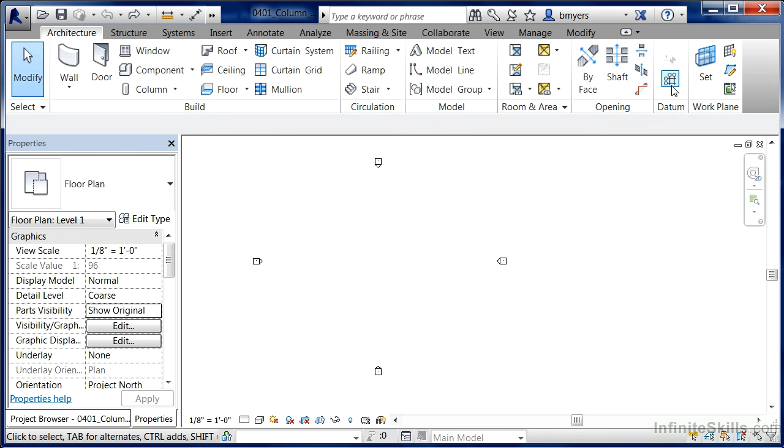Column grid lines are used to equally space your columns in your project. They're also used to be able to quickly locate your columns in your project. To draw in column grid lines, you'll find underneath the Architecture tab on the ribbon, on the Datum panel, there's a command called Grid. Select on the Grid command, move your mouse down into the drawing area.

Over on the left-hand side, toward the bottom, between these two elevation tags, make your first click. Move your mouse straight up, then click again just a little bit below this top elevation tag, but straight up at a 90-degree angle. If you zoom in at the top, you'll notice that this is a number 1. This is our first grid bubble.

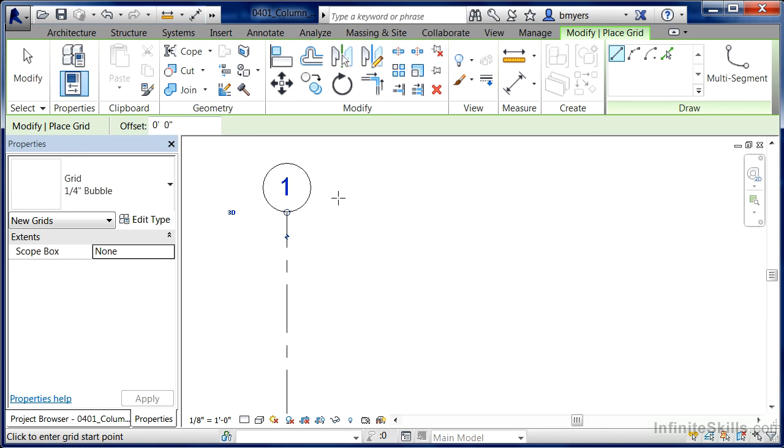Revit likes to keep things in order, which means the next one that we draw will be number 2. The one after that will be number 3. The same thing would happen if we had letters. So if this was going to be A, the next one would be B, and the following one would be C. Zoom back out, move your cursor down toward the bottom of the screen again. When you see these temporary dimensions show up, I don't care exactly what the dimension is at the moment, we will adjust this later. So just click when you see that temporary dimension.

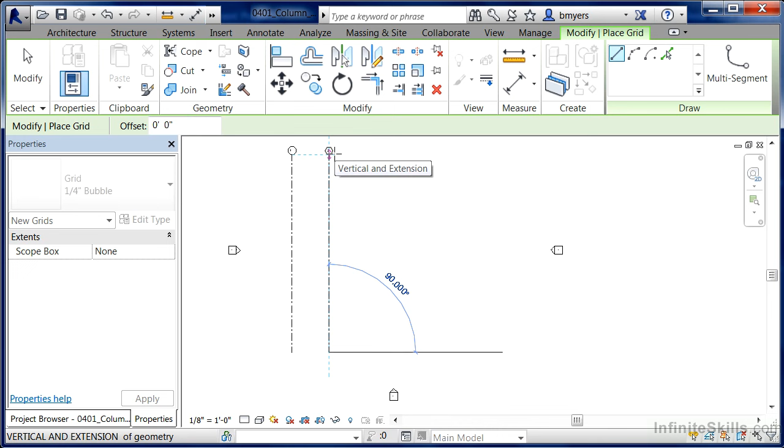Move your cursor up on the screen. When you're lined up with the column grid bubble up at the top of this grid line, you'll see a dashed line going between the two grid bubbles. Click when you see that dashed line. This means that these two grid bubbles are lined up with one another. Let's do the same thing for the third grid bubble. Come straight up and click again.

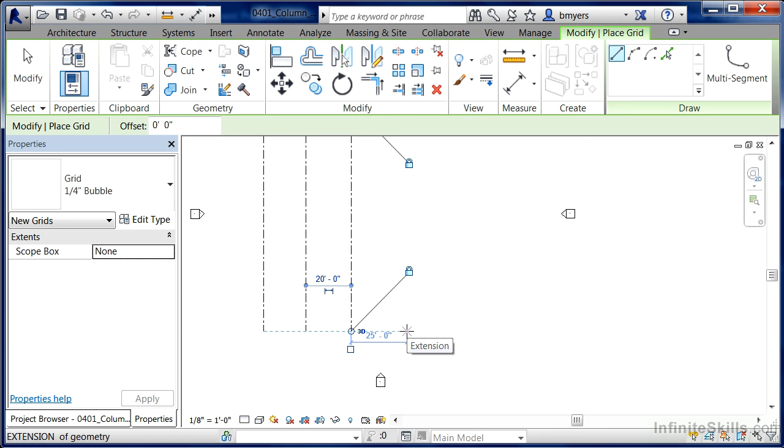Now, if we wanted to have a specific distance between these, we can do that as well. As soon as you see this temporary dimension show up, in this case it shows up as being 25 feet on my screen, type in 20. This is going to give us a 20-foot distance between the first one that we place and the next one that we place. Hit enter, and you can see that it's now made a 20-foot spacing between this one, which was the last one that we had placed, and this one, which is the spot that we just clicked.

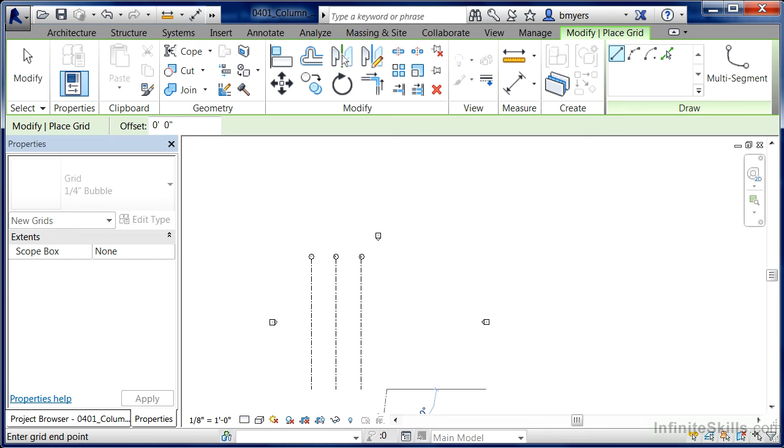Come up, click there, and do this one more time. You can either type in a dimension or just eyeball it, clicking and moving straight up. If we zoom in, we'll see that it's 1 through 5. Because of that order, it means that the next one that we will have will be number 6. The reality is, though, I want to go from right to left, and in doing that, we want to switch this from being numbers to letters. There's really no way to be able to do this on the fly, so we have to place the first one in and then adjust it after it's been placed.

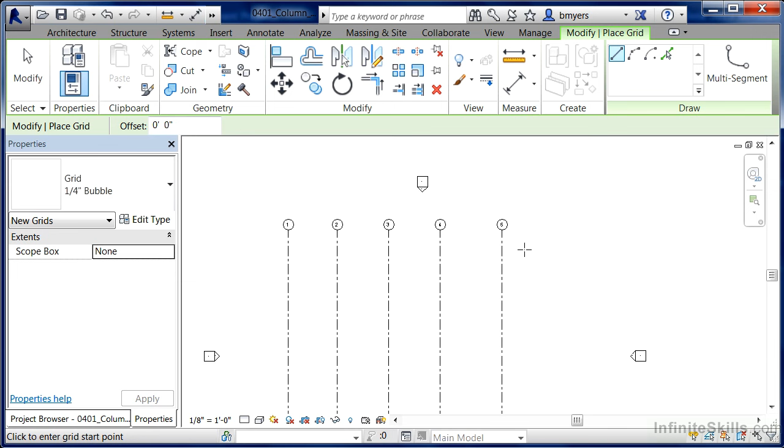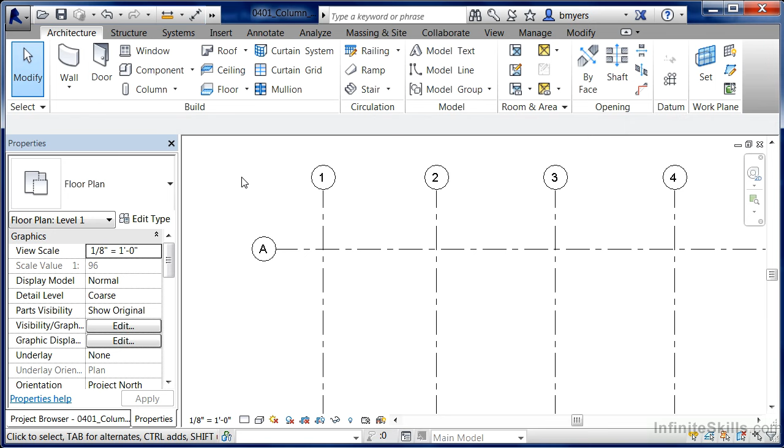So click over here to the right-hand side, move over, and click again. You'll see a number 6 show up. Hit escape a couple of times on the keyboard. Select on the grid line, click where the number 6 is at, and change that to be an A, and then click out here into space. Then hit escape on the keyboard to get out of the command. The next thing we'll do is draw in 2 more, so we'll be drawing in B as well as C. And since this last one was A, Revit will automatically label these as B and C.

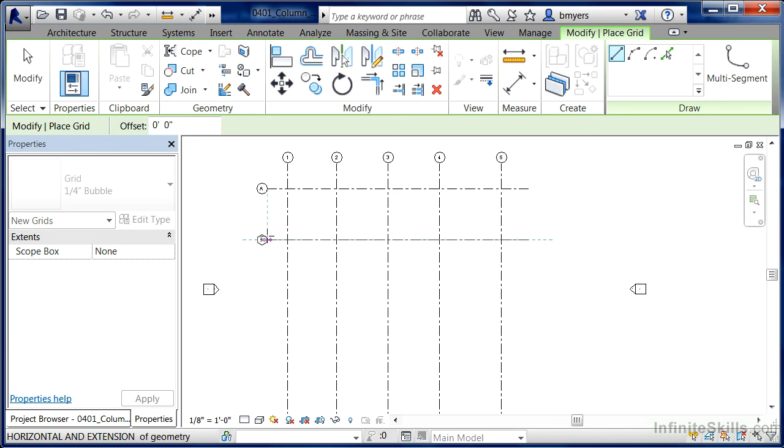Once again, under the Architecture tab, above Datum, select on Grid. Move your mouse down when it's lined up with the endpoint of the other one, click, move over, and click again. And do the same thing one more time. Zoom out just a touch. We're going to see that our grid lines come down pretty far, actually a little bit farther than what we probably need them to be. We will adjust these after the fact.

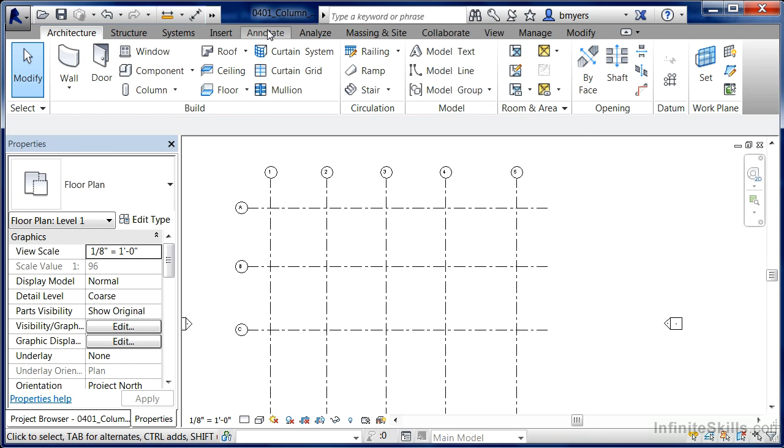What I would like to do now is be able to equally space these between number 1 and number 5. To do that, we need to add a few dimensions in. So come up here to Annotate, select on Aligned, and click the line associated with grid number 1. Then click the line associated with number 2, number 3, number 4, number 5, then click out in space. It's important that you click out in space because if you hit the space bar, the dimension will go away. After clicking all the way on across, click the little EQ that shows up. This will equally space between the first one and the last one in the dimension string.

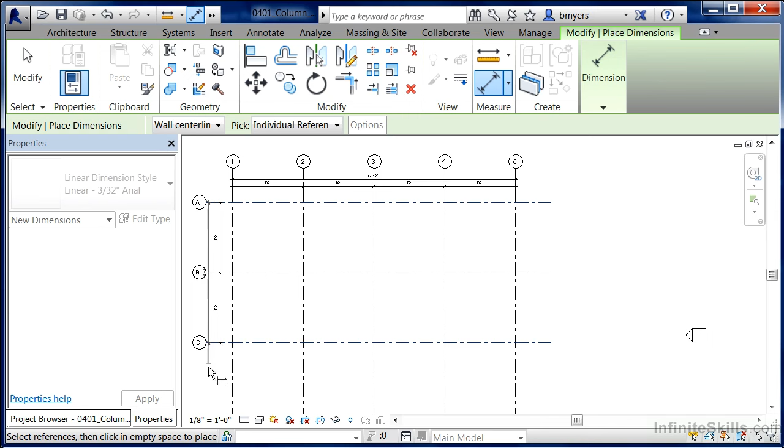Now do the same thing between A, B, and C. Click out in space and select the EQ. We also want to be able to have these spaced a specific dimension apart. To be able to accomplish that, let's drop in 2 overall dimensions. Click where the number 1 is at, click where number 5 is at, click out in space. Do the same thing with A and C, click out in space. When you're done with that process, hit escape a couple times on your keyboard to get out of the command.

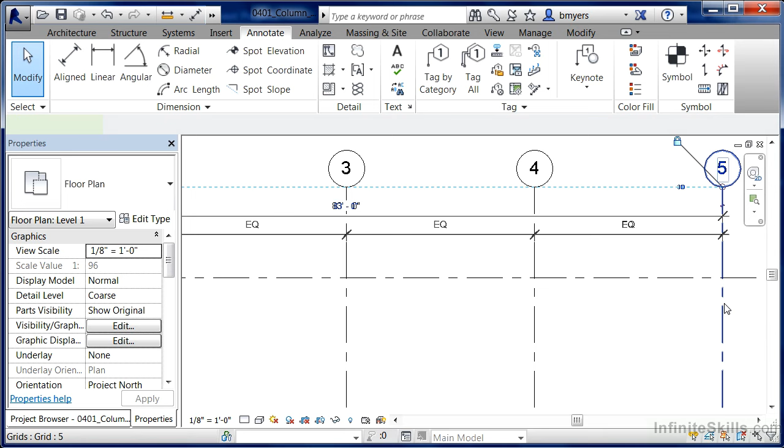Zoom in so that you can see this dimension. In this case, it's showing up as being 83 feet, but I'd really like this to be 80 feet. So move your cursor over and select on the line associated with your grid number 5. Come back over again. You'll notice that this dimension is now blue. Whenever the dimension is blue, it means that you can change that information. So click where it has the 83 feet and just type in 80. This will give you an 80-foot spacing between the first and the last. And then click somewhere in the white drawing area. It's automatically moved these grid bubbles, and they're continuously equally spaced.

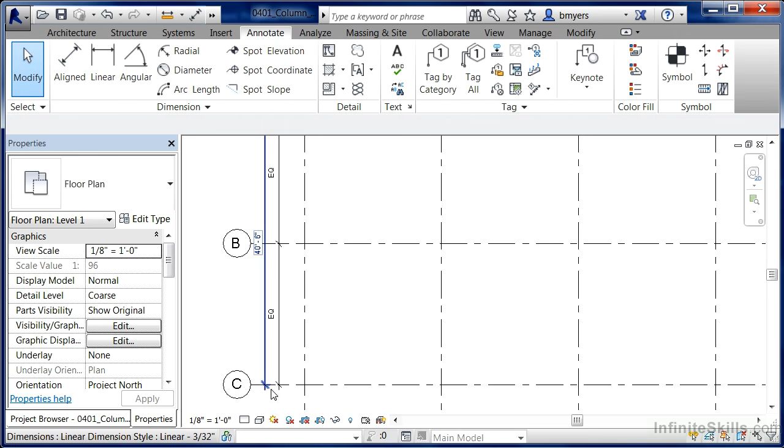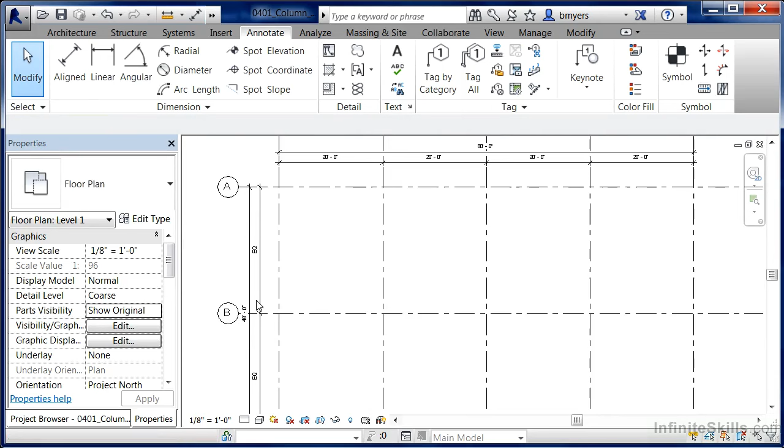Over here at the side, I don't want this to be 40 feet 6 inches. I'd like it to be 48 feet. So move your mouse down, select on the grid line, come up, select the dimension, type in 48, then click out in space. Finally, to see that equal spacing, move your mouse up, select on the dimension string, and you notice it says equality text. Change that to be value underneath your properties. So now they're spaced every 20 feet. And do the same thing on the side.

So by drawing in your column grid bubbles and placing these dimensions, you can quickly draw in your column grid lines and be able to equally space your columns when it comes time to place your columns in your project.